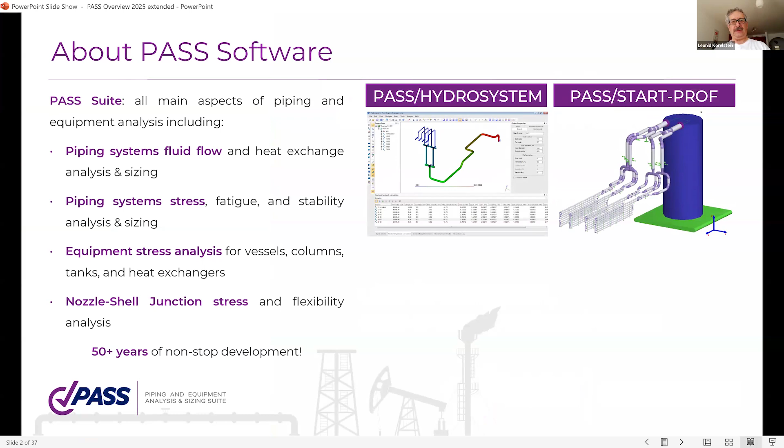So PASS software suite is a suite for piping and equipment analysis, simulation and sizing. Currently it consists of four main software programs plus some utilities. These software programs are PASS HydroSystem for piping fluid flow and heat exchange analysis and sizing, PASS Start-Prof for piping stress analysis,

PASS Equip for different kinds of equipment stress analysis such as pressure vessels, columns, tanks, and heat exchangers, and also Nozzle FEM for nozzle shell junction stress and flexibility analysis, and also some other non-standard piping and equipment elements.

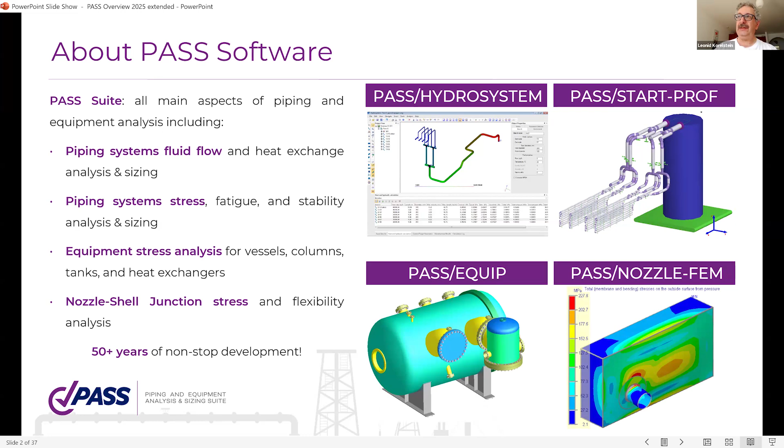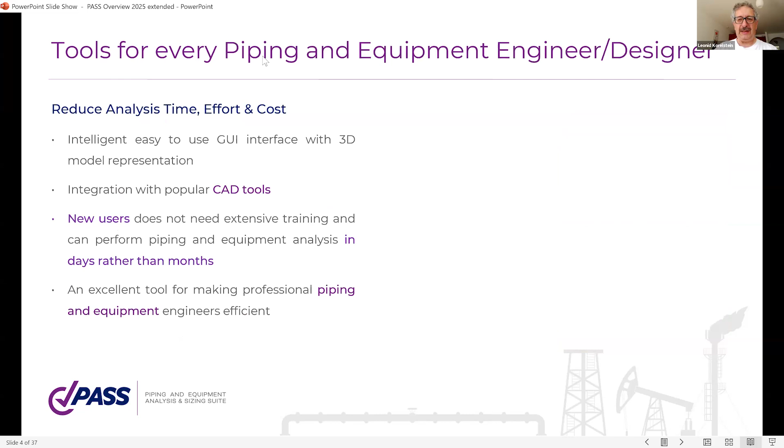So we position ourselves as tools for every piping and equipment engineering design. We're trying to combine the powerful functionality of our software with a very effective user interface and integration with popular CAD tools to reduce analysis time, effort, and cost.

And we also have some kind of embedded intelligence, through algorithms, libraries, a detailed help system, training system, videos, and so on, which makes our software very easy to implement, to start using in just days.

So now some words about parts of our PASS suite. First about PASS HydroSystem. This is how it looks. It's more than 40 years of development, more than 600 users worldwide. And this is an ideal tool for day-to-day use at different stages of a project, from process engineering, from principal design to detailed design.

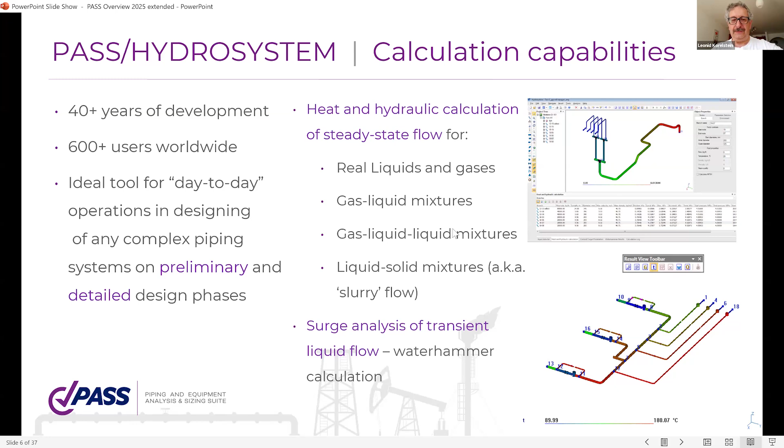Of course, for this analysis, we need a powerful thermodynamic engine, and we have it. We have our own libraries with more than 1,600 different substances, and can calculate mixtures, physical properties, and phase equilibrium. And we have a very good water and steam library. We have the GERG library for natural gas, including liquefied natural gas. And we also have integration with some other thermodynamic packages like French Simulis Thermodynamics or PVTsim.

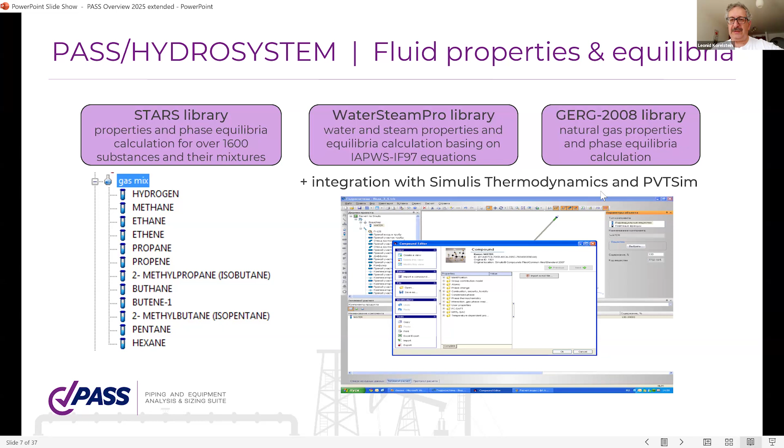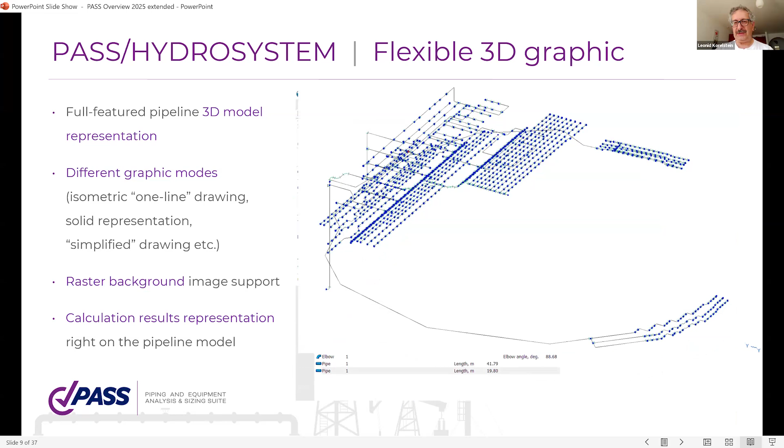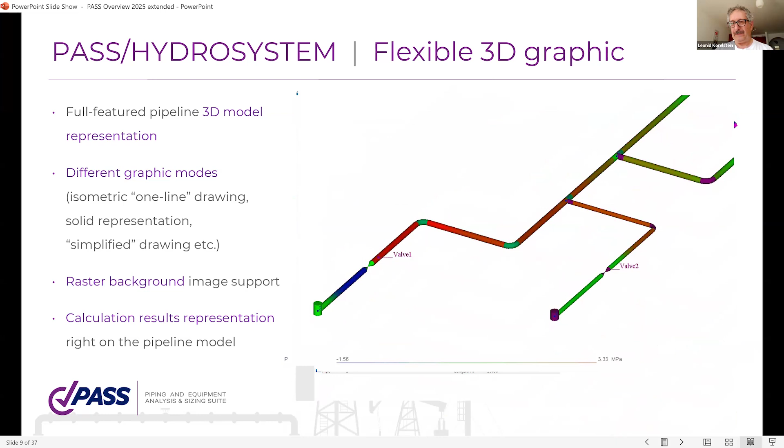For the model, we have multiple representations. We can do it in full 3D, scaled, non-scaled, on the plan, P&ID-like, and so on. These are some examples from our customers. And of course, the results can be seen both in tables and on the model, color-coded. You can see everything. You can see how waves are traveling along the pipeline in water hammer.

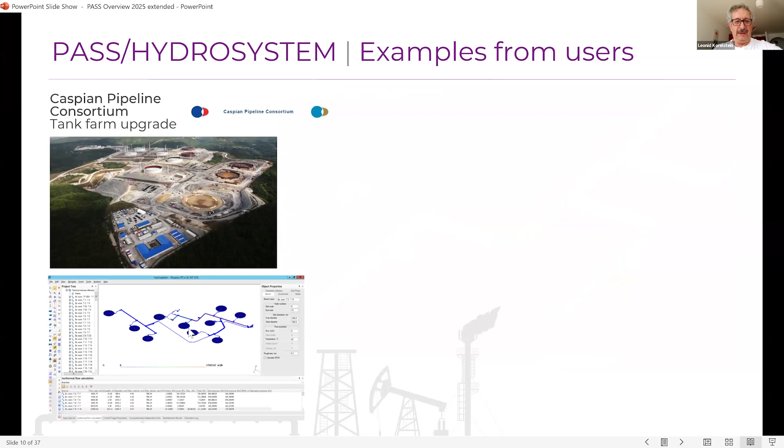Some examples from our users. Here is an example from Caspian Pipeline Consortium. This is a tank farm. And this is from Aalborg project for solar power project in Dubai. So we have a lot of different interesting projects.

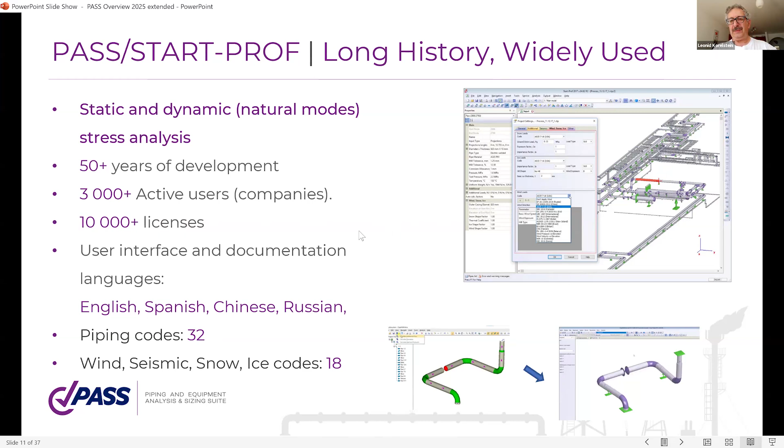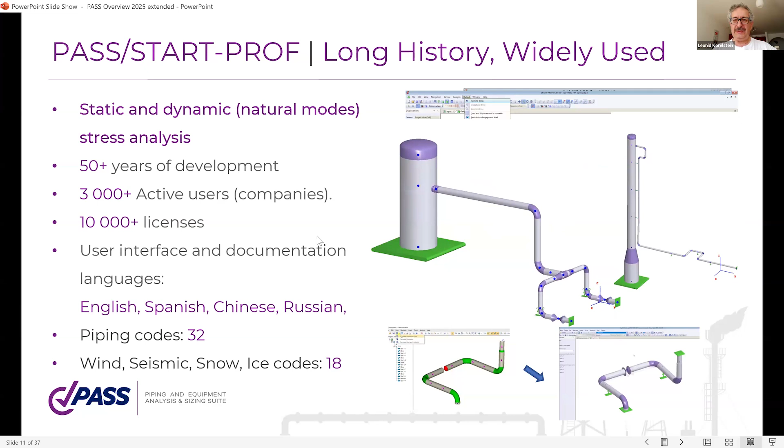Now about PASS/START-PROF, one of our most famous software, again with a long history and very widely used: more than 10,000 licenses, 3,000 active users worldwide, four languages supported, lots of different national and international stress codes, and you can see how complex models we can analyze. We can show results with all the deformations, color-coded, and where the stress concentrations are.

And we can calculate all types of different piping, including above ground and buried, on steel construction, vacuum, cryogenic, high pressure, high temperature, and not only metal, but also non-metallic piping, plastic piping, and FRP and GRP piping.

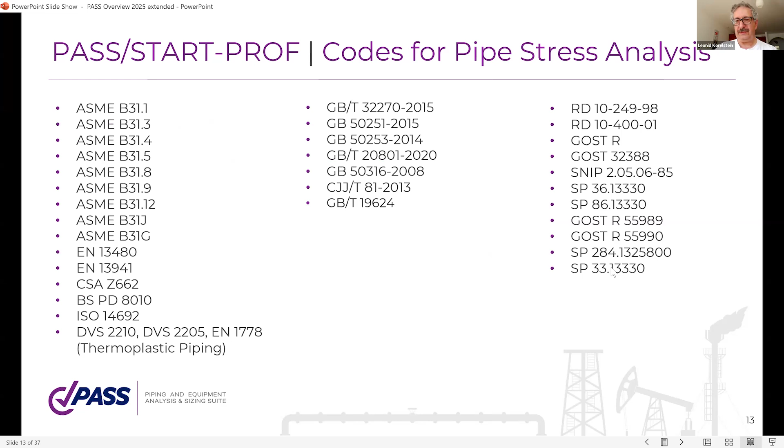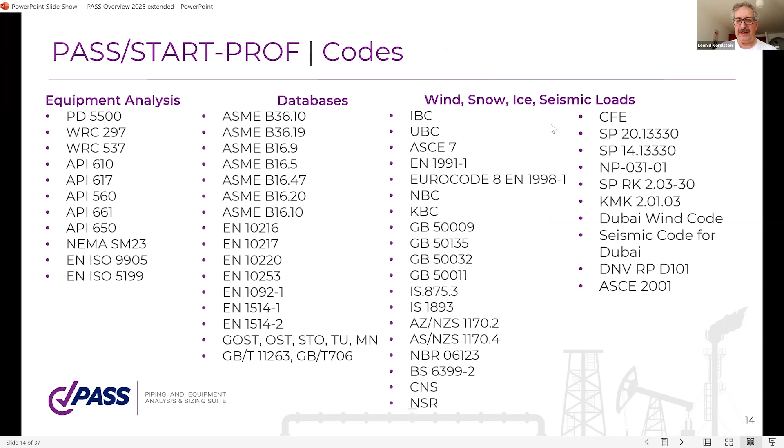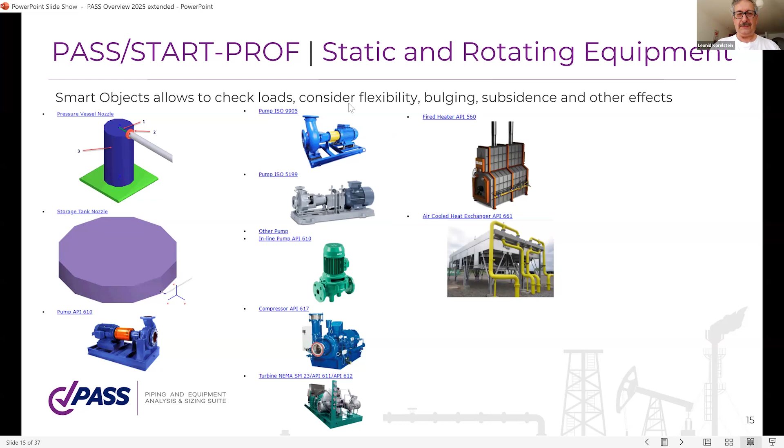And here is the list of current codes we support for stress analysis. It includes all international codes, ASME, EN, British code, Chinese code, Russian code. Also some codes for equipment, for different loads, wind, snow, ice, seismic loads, database of standard details, piping elements, and piping steels. And we also support some standards for allowable loads for different kinds of equipment or nozzles of equipment.

And here is a database for standard materials and elements. And we can do thermoplastic piping analysis. All the material data is already included in the database, and it's very easy to edit if necessary. And we have a very advanced engine for buried piping analysis, taking into account all kinds of interaction with the soil.

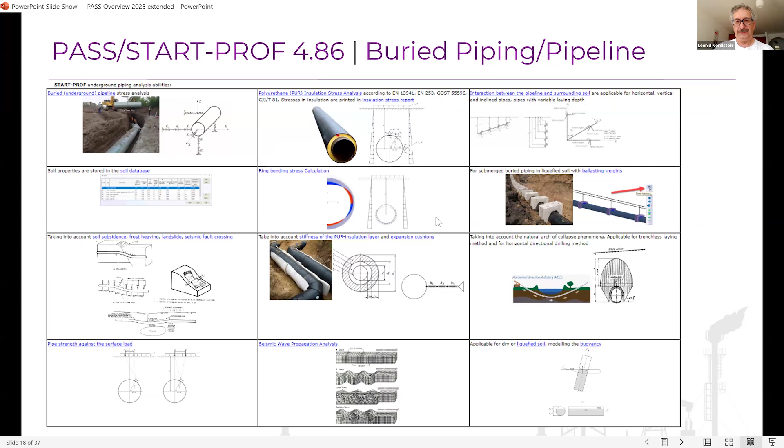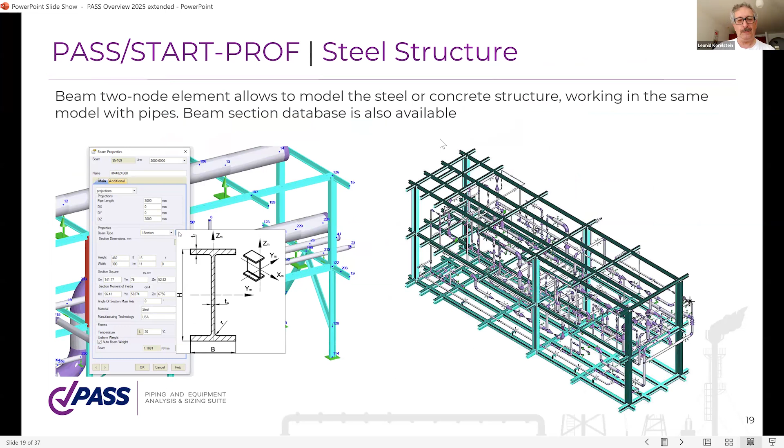And we can define steel structures inside the program and analyze the behavior of the pipeline interacting with steel structures. And also we can do seismic analysis. It includes seismic wave propagation for buried piping.

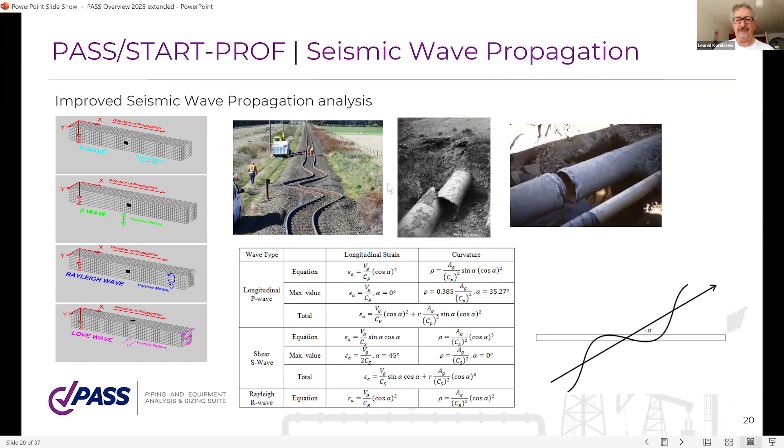And we also have interaction and integration with HYDROSYSTEM. So we can get the model from PASS/START-PROF, make necessary calculation of water hammers or define parameters of slug flow, define unbalanced loads, and export the unbalanced loads back to START-PROF, using them in the phase of analysis.

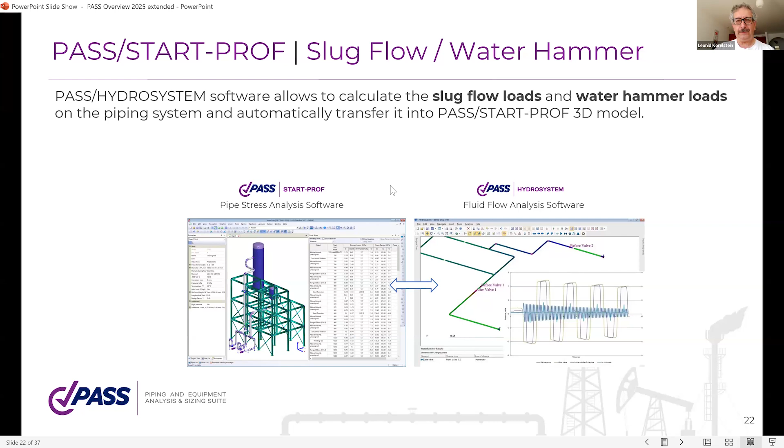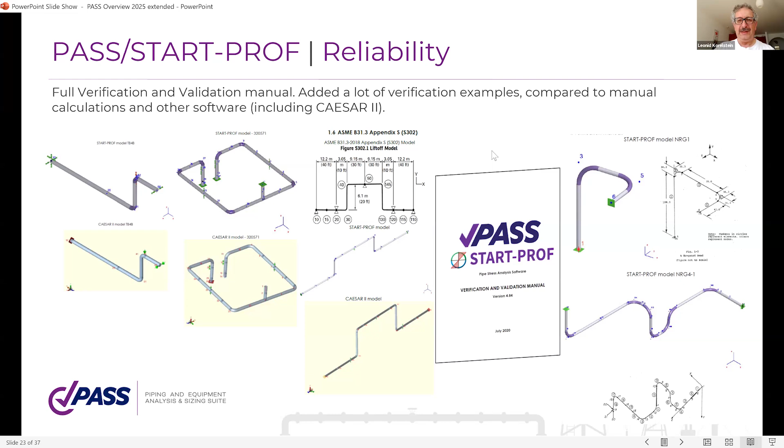For PASS/START-PROF, we also have a verification and validation manual, very detailed, which is delivered to any user. Here we checked on multiple examples that the calculation is correct. We compare them with manual calculations when possible, and with calculations by CAESAR II. And by the way, we found a lot of bugs in CAESAR II.

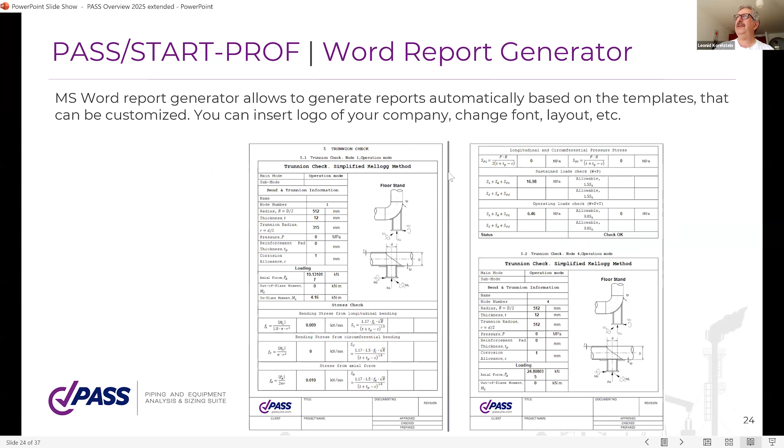And this is how reports look. We can export them with all details to MS Word to be included in your project. And we also can export them in the form of 3D stress isos, both for START-PROF and for HYDROSYSTEM, with all drawings and also analysis results, again, to check and to include into your project documentation.

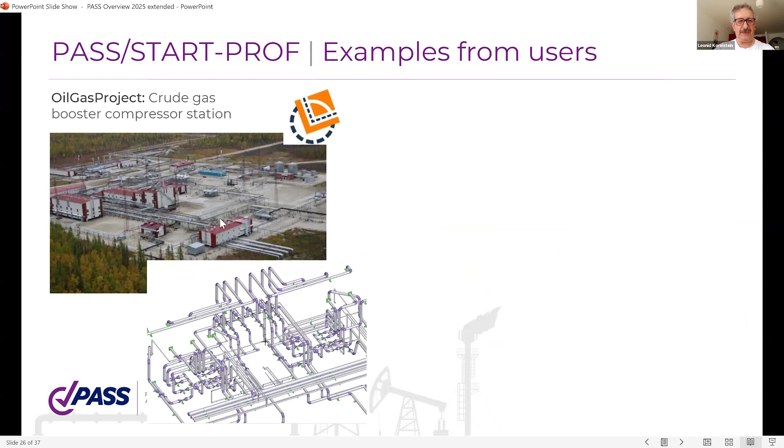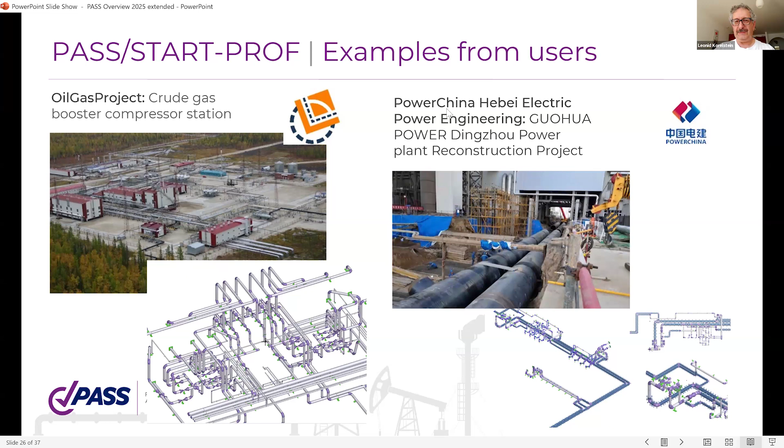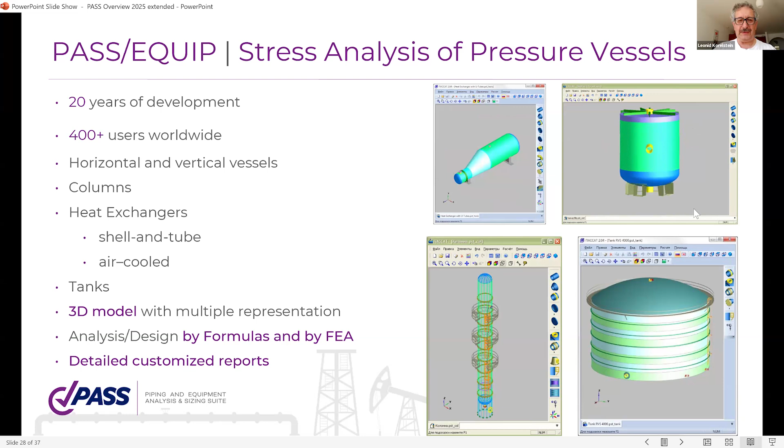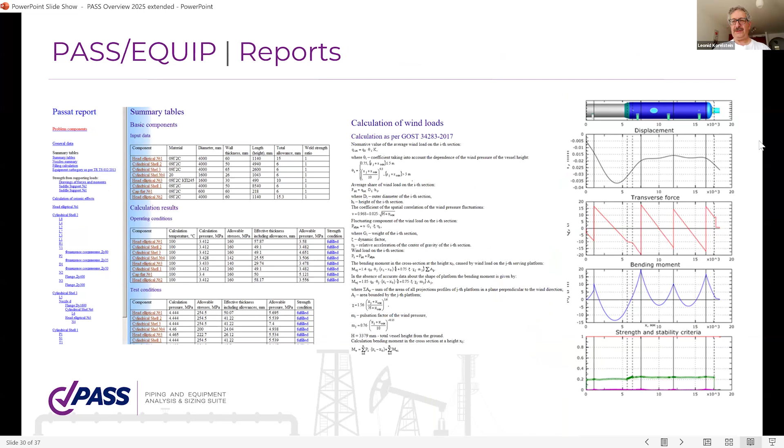Okay, and some words about two other parts of our suite. PASS/EQUIP, stress analysis of pressure vessels. Here are the different types of equipment which can be analyzed, including some complex equipment like double heat exchangers or with piping. And results are very detailed for each element. You can see all equations, all forces, moments, and so on.

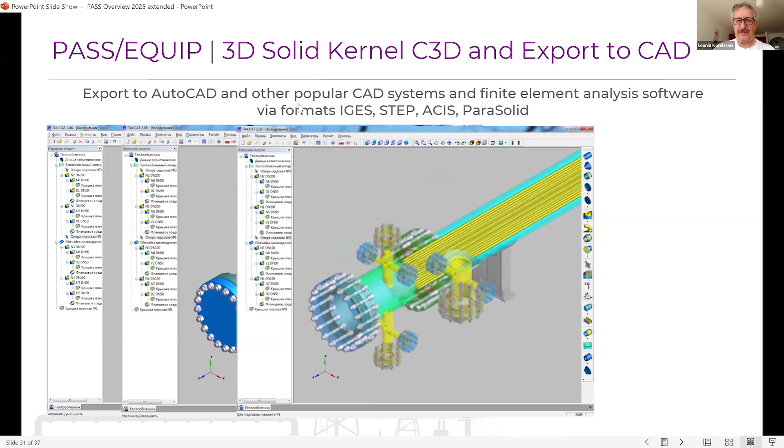And we also have a 3D solid kernel, and this allows us to export our models to IGES, STEP, ACIS, Parasolid, and some other popular formats, and to import them into CAD software, for example, AutoCAD or SolidWorks, or any software which supports these formats. Some examples. Here are vessels from our customers, a real vessel and models.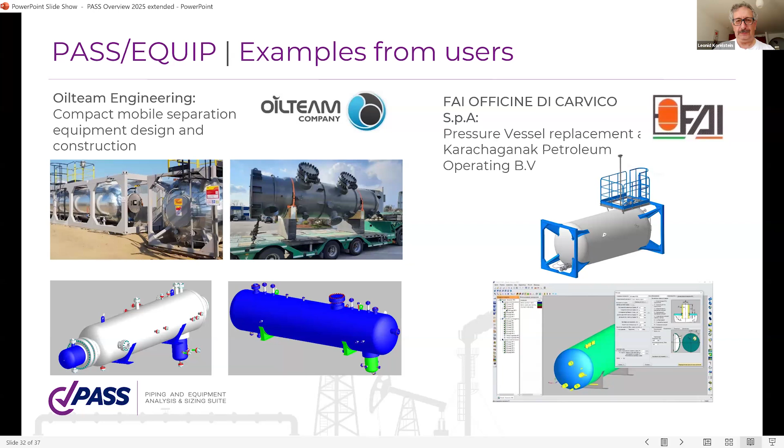And last but not least, PASS/NOZZLE-FEM. This is our FEA engine, which was developed just to make this kind of analysis for complex geometries like nozzle-shell connections, but just by the click of a button. So you just need to define your geometry: what type of shell you have, what type of nozzle connection you have. And the software will do all other tasks itself.

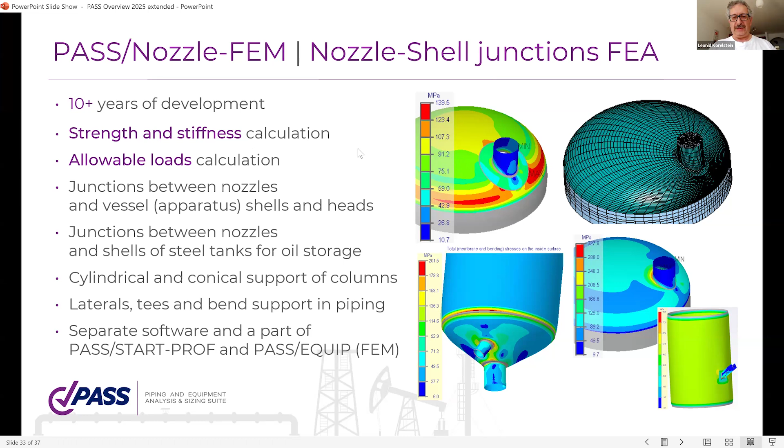So it will create an appropriate mesh, it will make the analysis, it will process the results and show them in the post-processor, and get all allowable loads and flexibilities, and you can use these flexibilities in other software. And here is how we can integrate all our programs together, but I already talked about this.

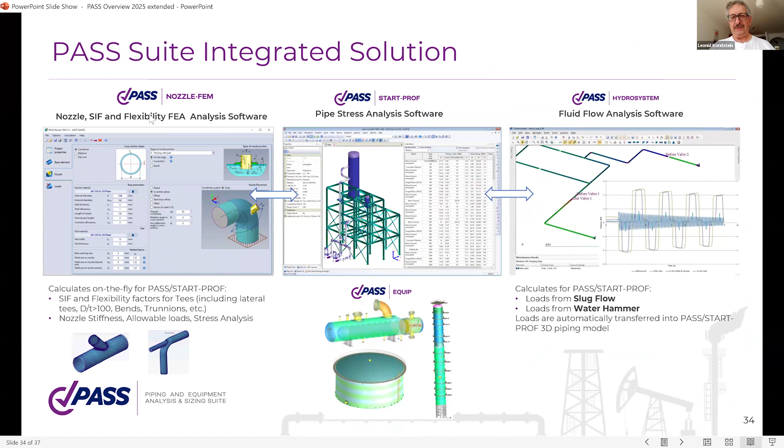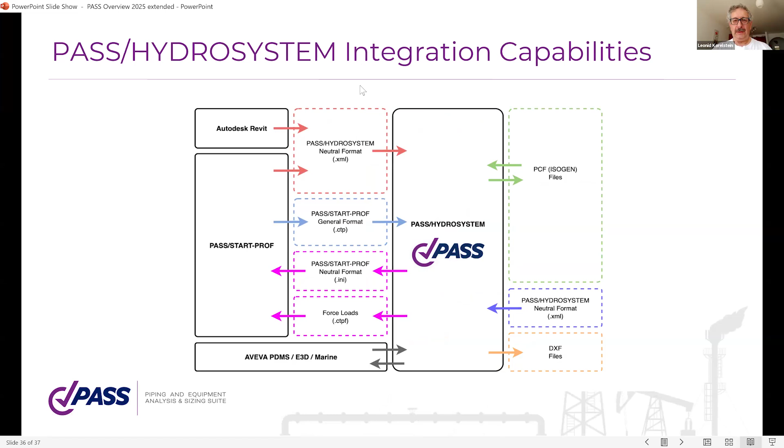And a similar diagram is for PASS/HYDROSYSTEM. And my last slide is specifically about Revit integration modules in PASS. So we have several Revit integration modules, and we will show you today two of them. This is the Revit PASS/START-PROF integration and the Revit PASS/HYDRO-SYSTEM integration.

So the Revit PASS/START-PROF integration is now a two-way integration. So you can not only import the models to PASS/START-PROF from the Revit model, but also return some results and some changes to Revit. And we can also import it to PASS/HYDRO-SYSTEM.

And an interesting separate module, which I would like to mention, is our Revit PCF module, because Revit, in its piping modeling opportunities, doesn't have PCF file production for Isogen. So we just fill this void and created our own module, and we have some users who efficiently use it, for example, to forward these configurations to some other CAD software specifically for piping design, to produce isometrics, for example.

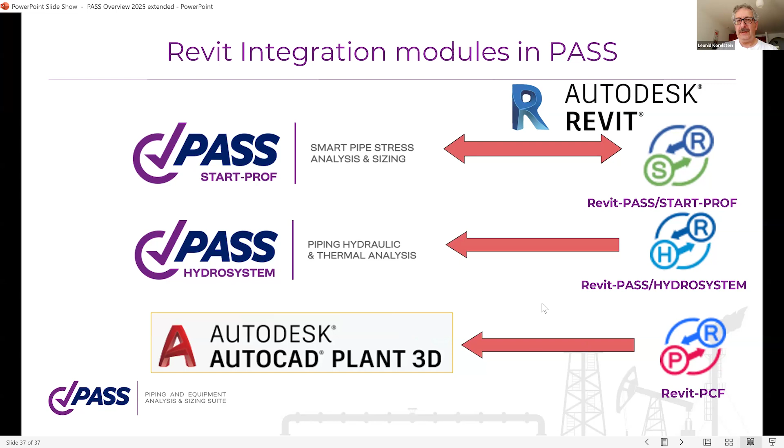Okay, this is what I would like to show you. And now that you have some general impression about our software, let's show you how we can integrate it with Revit. Nick?

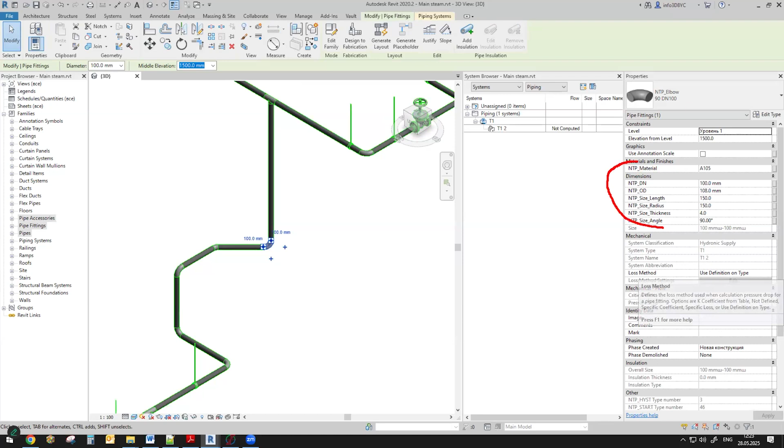So to perform the export, the elements in the piping system of the Revit model must meet the following requirements. First of all, they must belong to special categories, which are highlighted in the project tree. So the categories are pipes, pipe fittings, or pipe accessories. And the next requirement is that the element families must contain a specific set of parameters. For example, like this and like this.

So let's briefly take a closer look at the parameters. Let's take a closer look at this elbow. The parameters can be divided into two groups. The first group is mandatory parameters, which define the geometry of the element, and they are mandatory for export. It's like outer diameter, radius, etc.

The next group is additional parameters. They can be stored in the Revit model. Mostly they are process parameters and various options of transmitted elements needed for analysis, like corrosion allowance, weld quality factor, and something like this.

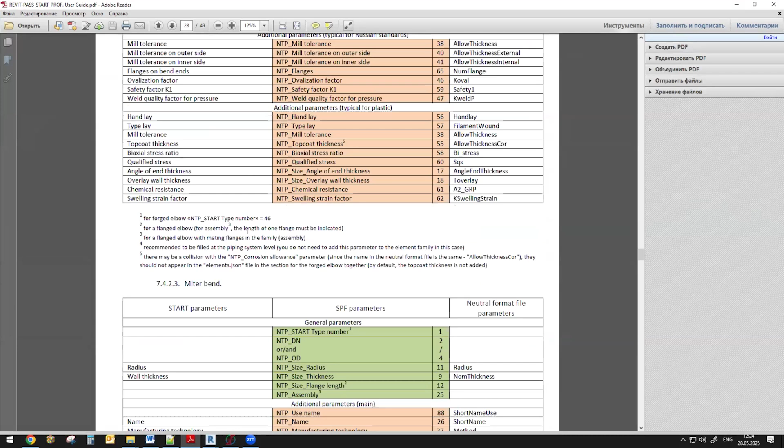How can you operate with these parameters? You can add parameters to the family from the standard Revit function, the shared parameters file. It is supplied with our module, like this. The list of required parameters for each element you can find in the user manual in these tables. So the user decides how much data should be stored in the Revit BIM model.

And also you can use the mapping file between Revit and PASS/START-PROF. As you see, it's a classic JSON file. It can be manually configured for specific company needs. Working with this file is also described in detail in our user manual.

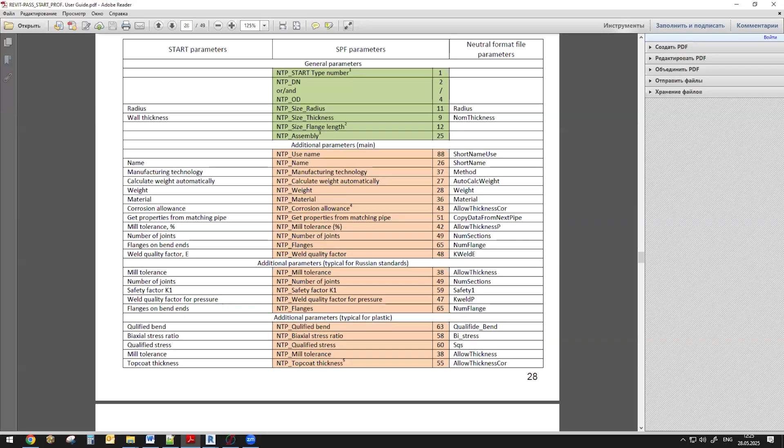So let's go back to the module and transfer our model from Revit to PASS Start Prof. You just need to add a pipeline to the list, define the file name, and click export. So the export completed.

Now we can go to PASS Start Prof, select our file from the first step, and just load it into PASS Start Prof.

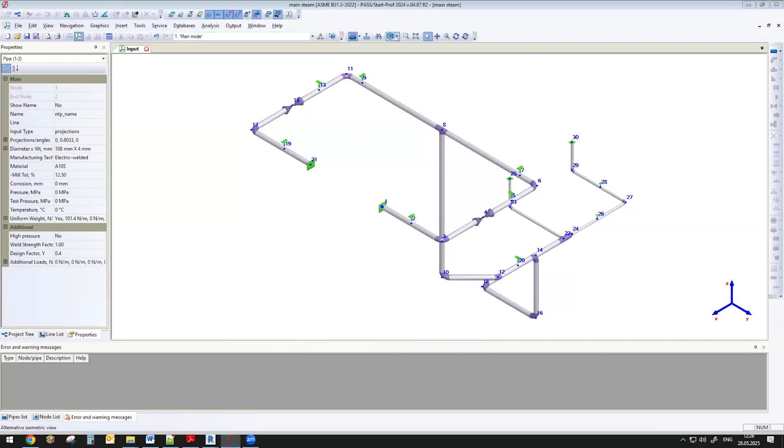So we need to define some data like codes. Let's switch to isometric view. So as you see, the model is the same.

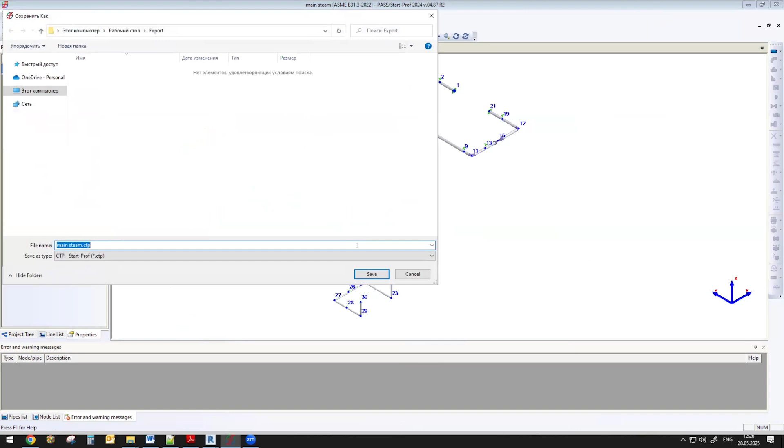Since we filled in the minimum required parameters in the Revit model, we can immediately run the analysis without entering any additional data. So we just need to save the file, click OK, and run analysis.

So here are the analysis results. Here is the deformed shape of our pipe.

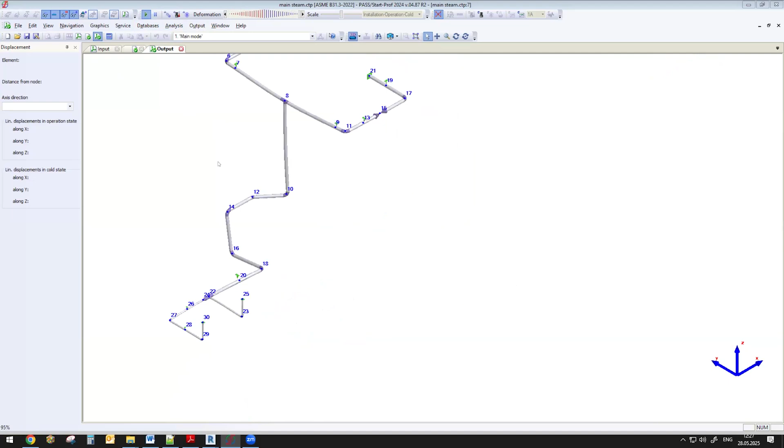So let's make some changes to this model. For example, we want to add two sliding supports in the vertical branches here and here, and move supports in the direction of the tee, in these directions.

So let's make this change. It's very easy. We just need to add the node element, define the position, like this. And we need to add the node here.

Now we can insert sliding supports. And then we will move the guide supports. Here. And here.

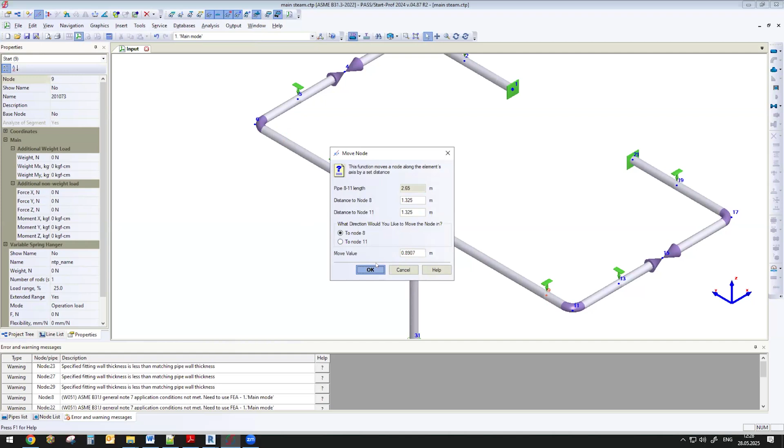Now we run analysis again. See that there are no red cells in the alerts window.

And now we can transfer this model back into Revit. So let's see the deformed shape, everything okay with the model.

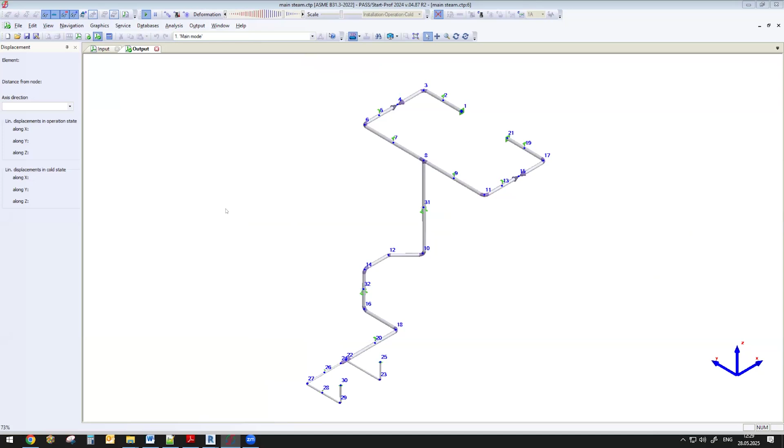So during the export back, we need to create two files. The first file will contain the geometrical data, and the second file will contain the analysis results.

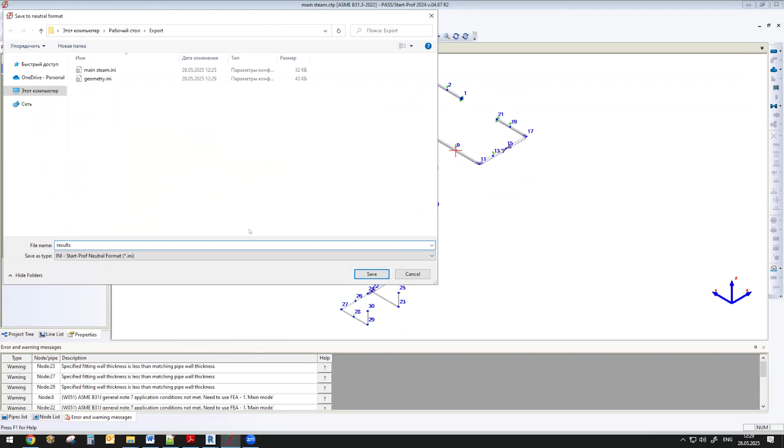By the way, it's not necessary to load both files in Revit. You can either update only geometry or only import loads. But now we will select two files and see what happens.

So pay attention to the position of the supports. They were moved in the Revit model, and the special markers were added on the vertical pipes. This is the placement of supports.

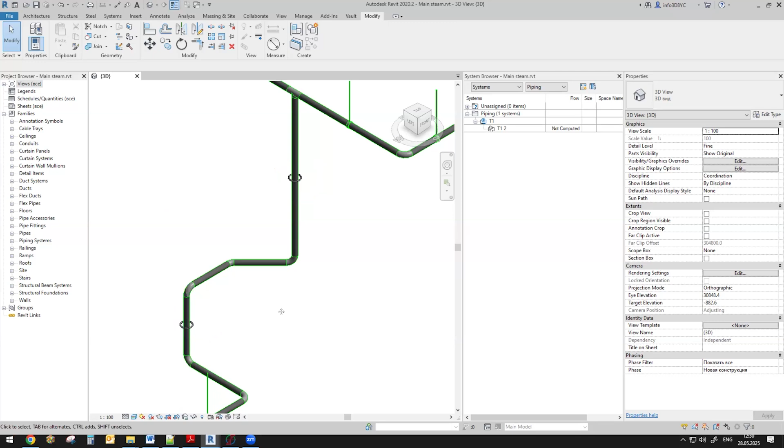So this back functionality export does not require any additional user configuration. You can see the forces were also transferred. So all the attributive data was transferred to this model.

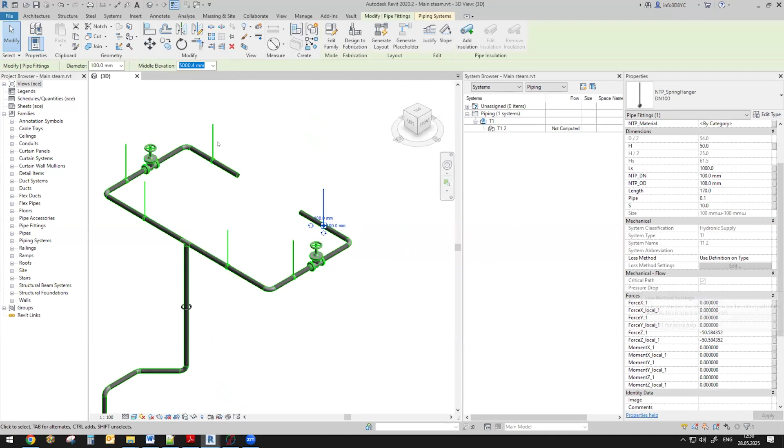Okay, let's see another interface. It's the interface between Autodesk Revit and PASS Hydro system. It looks mostly the same as the previous interface.

We just need to select the pipe, add it to the browser window, define the file name, and click export. So the export was completed. Now we will transfer this file to Leonid.

Leonid, please go ahead. Can you show us what you can do with this result of the export? Yes, sure. Let me share my screen. Okay, here. Sorry. Oops. Just a moment.

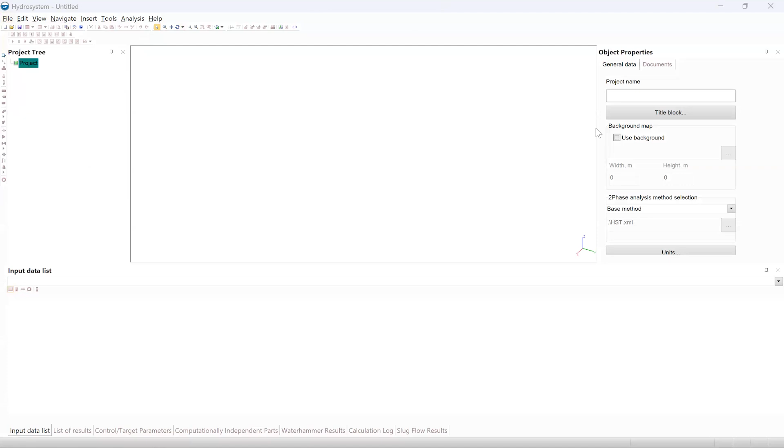Okay. Now you can see the Hydrosystem window, and let us import this file. Oops.

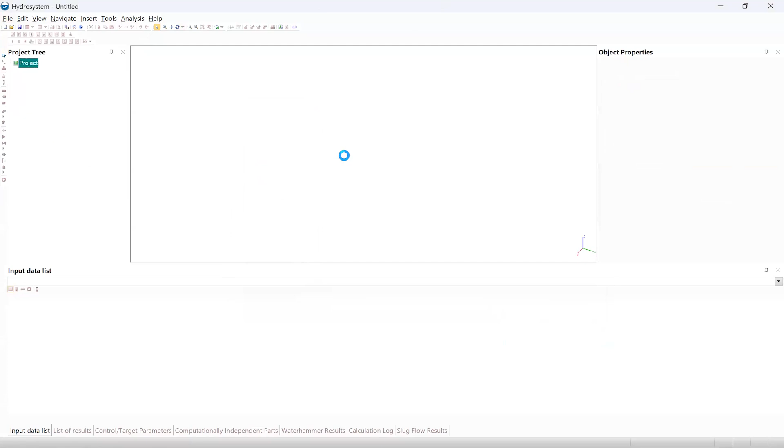Okay, we need the XML file. Here is the XML file. Okay, here is our model. We can look at it in 3D, real 3D.

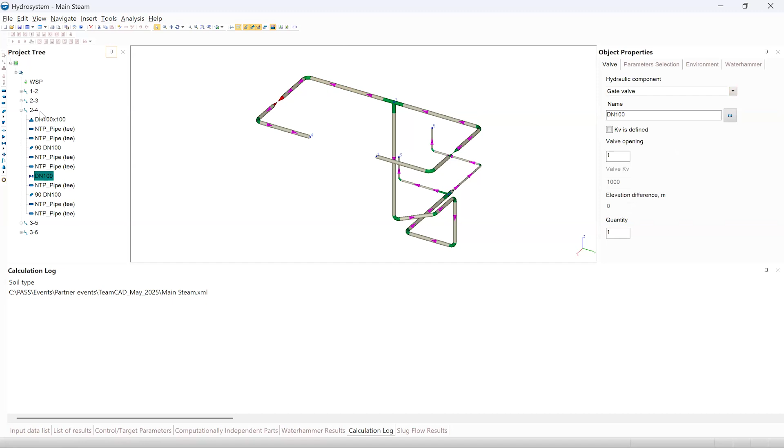So as you can see, it's identical, and not only identical, it has all geometric configurations, lengths, and elbows, and valves, and it splits and describes it in terms of branches.

And you see that we also have inner diameter and outer diameter. So it's almost ready for some hydraulic calculations, but not all data is here.

You need to define the fluid transporting along this pipeline, and for this you go here, for this part. And here you can define different thermodynamic libraries, or you can define fluid properties simply by inputting them.

But let's select, for example, water steam. Then you don't need to add even any composition.

And of course, we need to define some boundary conditions. We need to define some pressures in the source or in the end nodes, or we need to define preliminary flow rates.

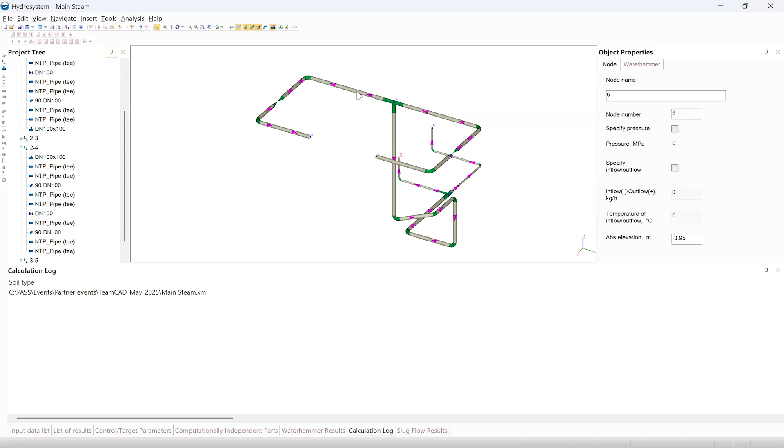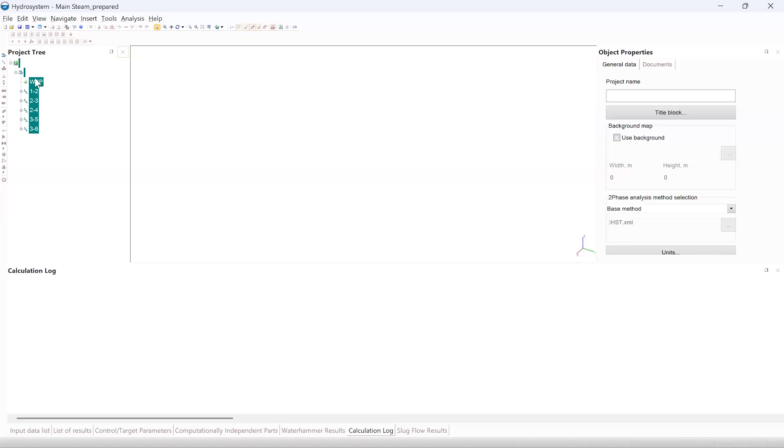Okay, I already did it to save time, and here is this prepared example. Okay, here is the same example, but I defined some, if we can show this, just a moment. Oops.

Just, oops. Calculation Log, oops. Uh-huh. Data, yes. Oops. Mhm.

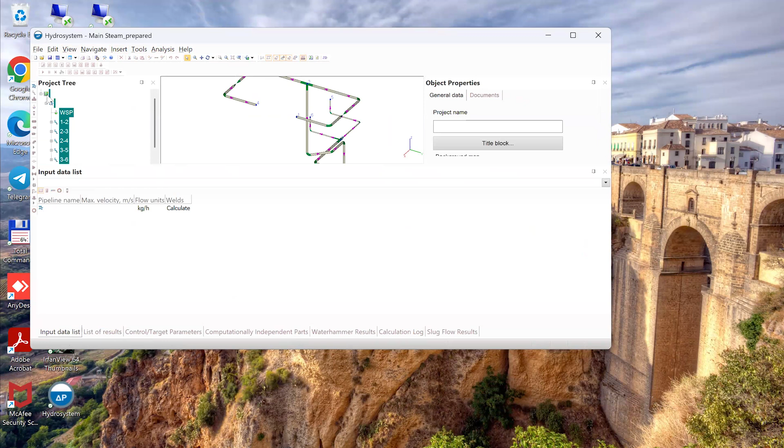Yes, you see, we can see all components, we can see branch, and you see that in branch I define source pressure in the source, and I also define some flow rates which we would like to transfer. So we will do some check of this system. We will calculate all pressure drops, calculate what will be the pressures at all points of the system.

Okay, let's calculate the normal flow. Here it is, we have all the results. We can look at them in general on each branch, which is the starting, which is the maximum velocity, which is start pressure, end pressure, and we can see each element.

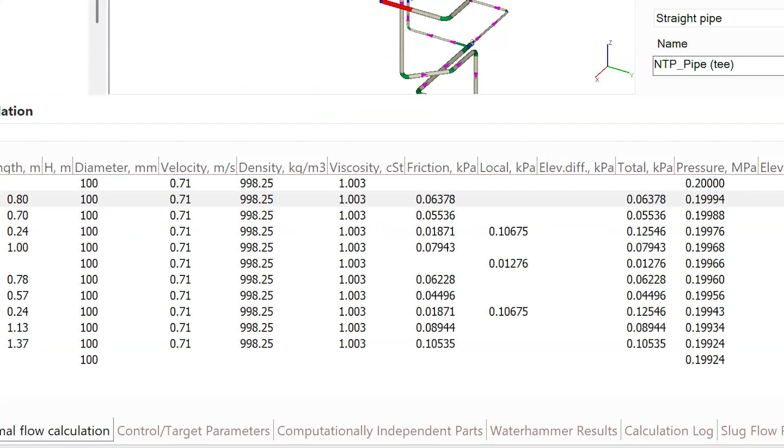We can see velocities, densities, all components of pressure drops, and so on. And we also can see it visually. We can see where is the maximum pressure drops. We can see velocities. Here is the maximum velocity, the rate, and so on.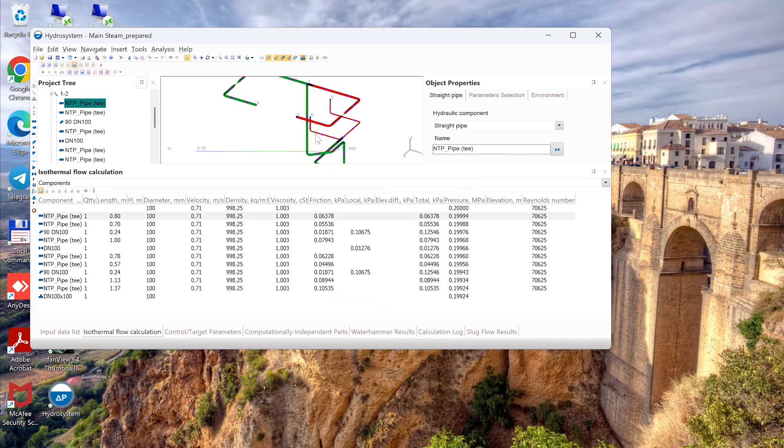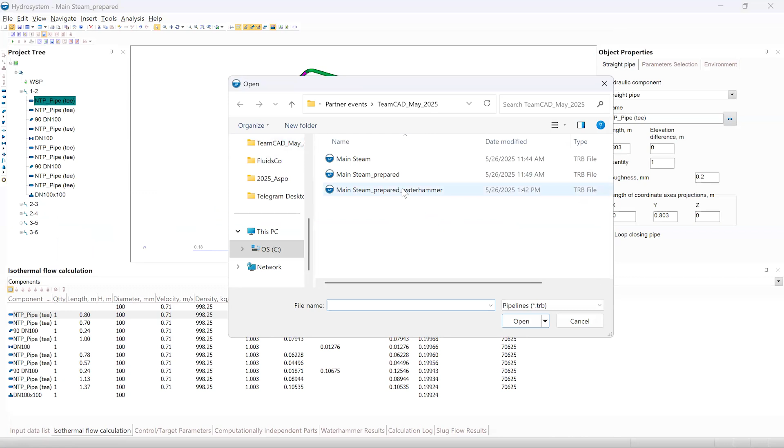Okay, let's do something more interesting. We'll open the same file prepared for water hammer analysis. What I made here, I define that this valve is closing after some 1 second interval.

And let us see what will happen. I also defined here 2 points to look for changing of parameters, one near the source and one just before the closing valve. Let us see, and let us see also meanwhile.

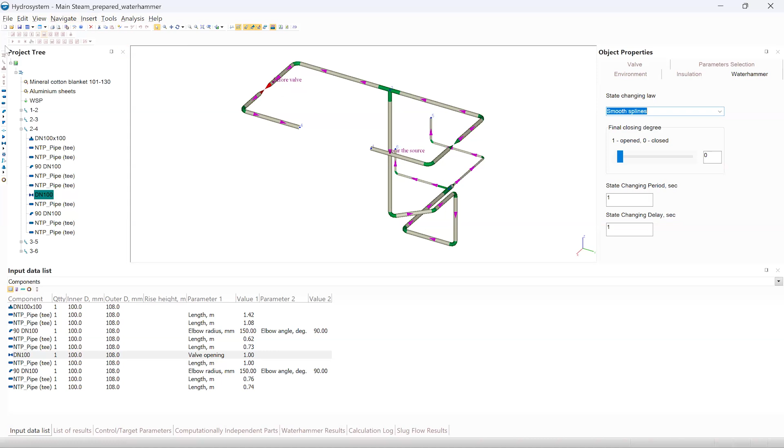So first we need to do steady state flow, okay, for isothermal flow, for example, it's right. Then on the basis of the isothermal flow, we will calculate this water hammer. Okay, let's look at the pressures.

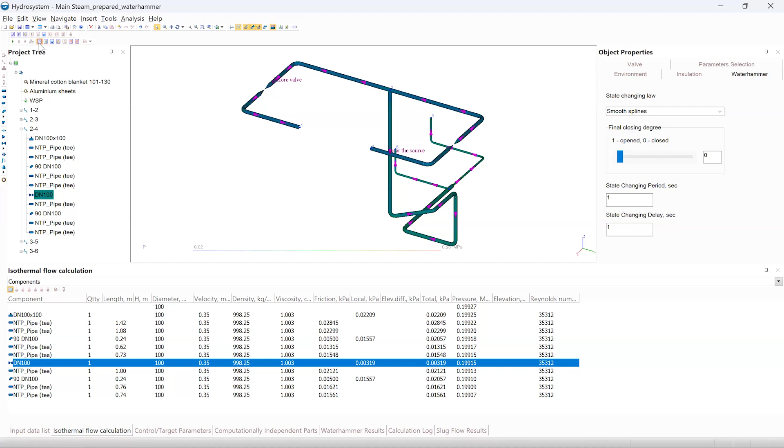Just see the calculation, oh sorry, running here. Maybe not so convenient, let's switch to this here. Can you see it? No, no, it's not seen here. But let's look, okay, calculation is finished.

And let's look at some plots. Let's look at pressures. So you see what's happening here when it's closing. So we have a peak. We have a really big pressure peak before the closing valve. This is what we could expect because of this water hammer effect.

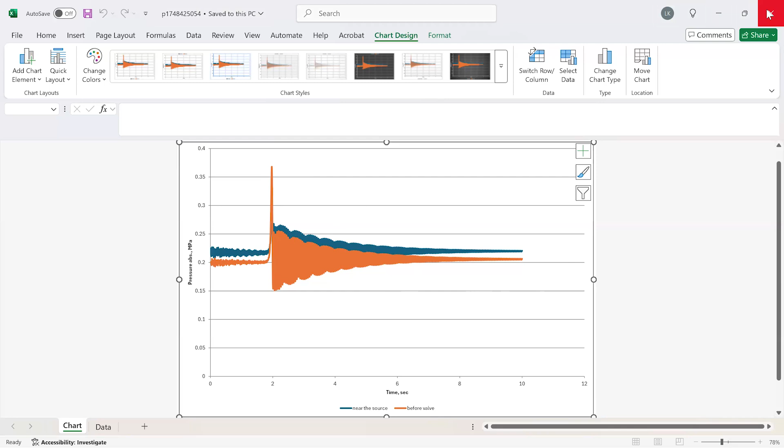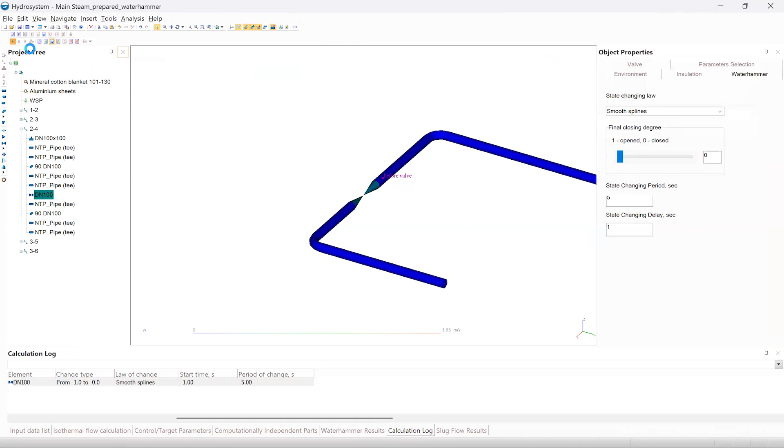How could we change it? Well, the simplest way is just to close this valve more slowly. Let's close it in 5 seconds and recalculate this.

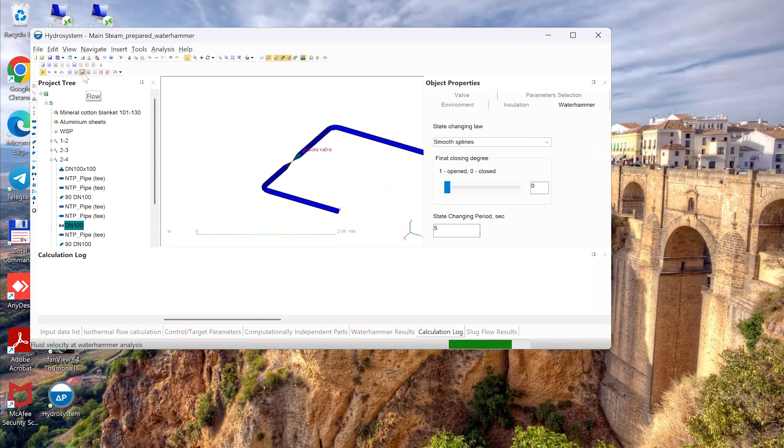We can stop this calculation at any moment, but I'm trying to do what I don't see. No, I don't see it. Now let's look at pressures again.

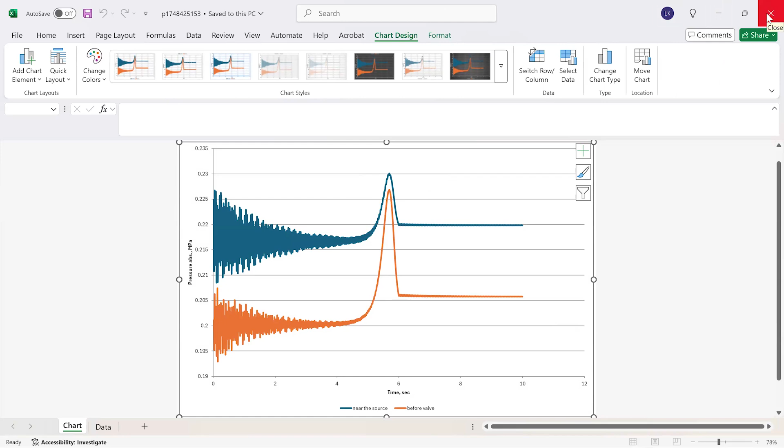As you can see, now these peaks are quite smaller. But this is, of course, the simplest way to manage water hammer effects. There are a lot of others. We can put some dampers. And of course, the natural way is to calculate unbalanced forces because of water hammer.

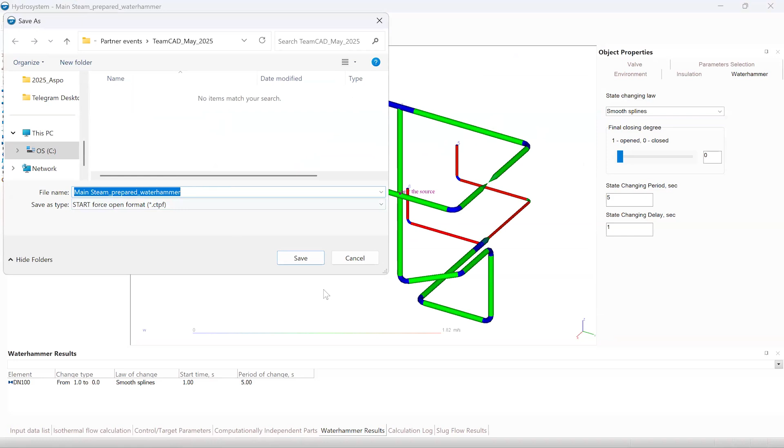Unbalanced forces are forces which act on elbows, tees, and so on. And here is a tool. We can do force export, calculate unbalanced forces for water hammer and send it to CAESAR II or START-PROF in a special format like this one. Name it, START-PROF water hammer, save. Then we can open it in START-PROF and it will apply it as additional forces

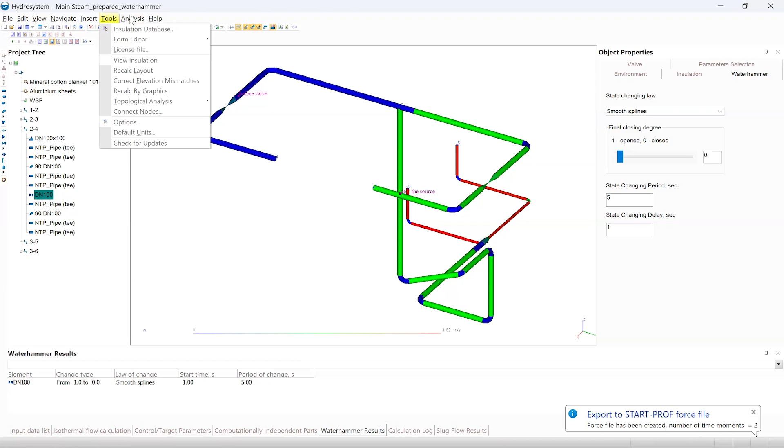in our START-PROF analysis. And the same can be done with two-phase flow. Here is a slug flow calculation to START-PROF.

I also add some insulation material here. You see that we have a standard insulation material database, and you can select some different insulation, for example some minerals. Let us select, for example, rock wool blanket. And we can define temperature, define high temperature, 90 degrees.

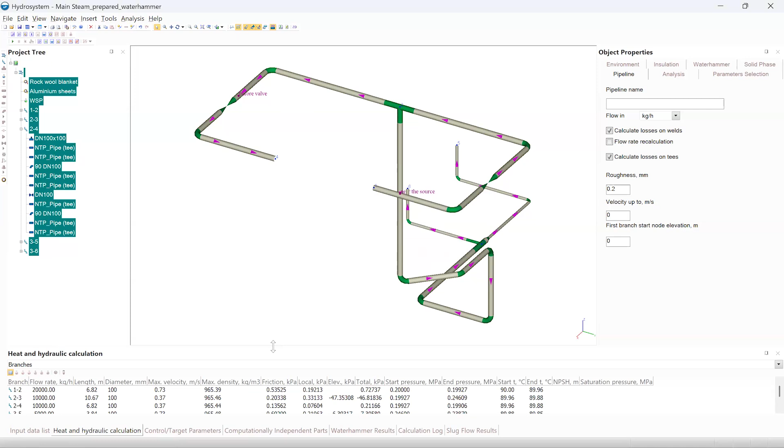And I would like to analyze, to make not isothermic, but heat and hydraulic analysis. Yes, the results are here. We can look here, we can look, for example,

very cool, look at this. Where is our heat losses? And we can see how the temperature changes. It changes very small, the changes are very small because of good insulation.

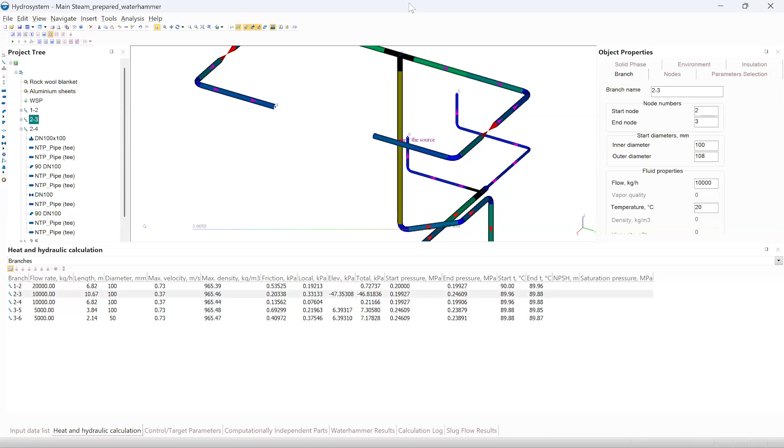So I think it's enough for today, and let us give some time for questions.